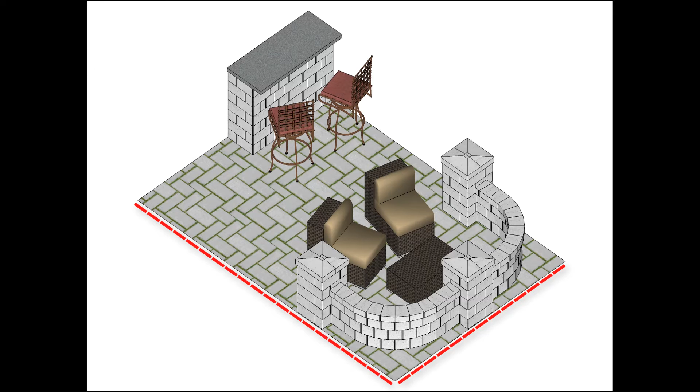AB Courtyard Patio Package, Burgundy. This patio package will fit on a 12 by 19 patio. These basic instructions can be modified to fit a different patio size.

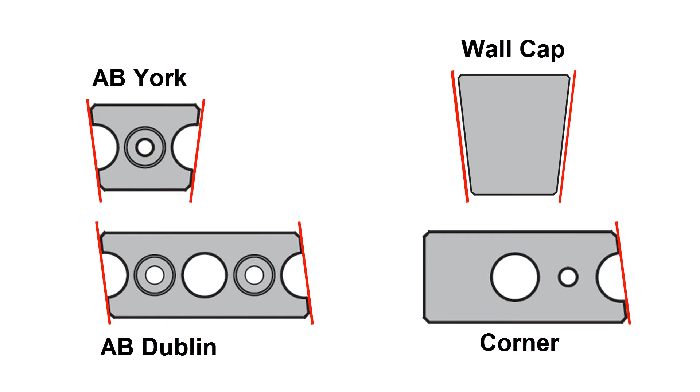This layout will use the following blocks. The blocks are modular in size, with 2 AB York blocks equaling 1 AB Dublin block. The blocks come with built-in angles, so during construction, when an AB York, AB Dublin, or a wall cap meets up to a flat surface, some cutting will be required to give a finished look to the project.

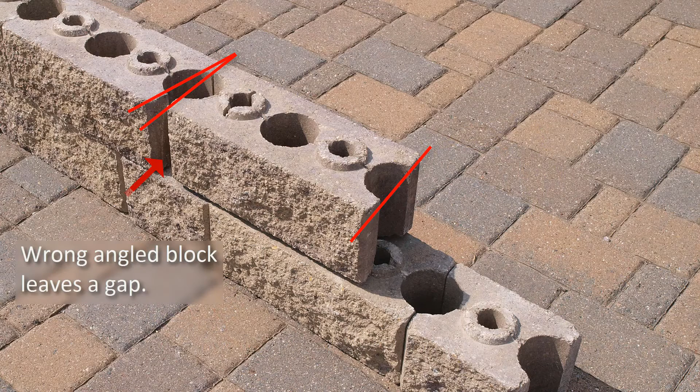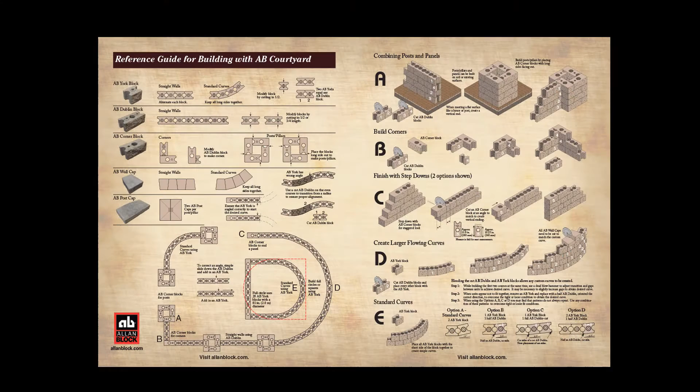During construction, the AB Dublin blocks may be angled the wrong way, leaving a gap. Simply slide the block over and add in an AB York block. For more details on proper construction, see the AB Courtyard Reference Guide.

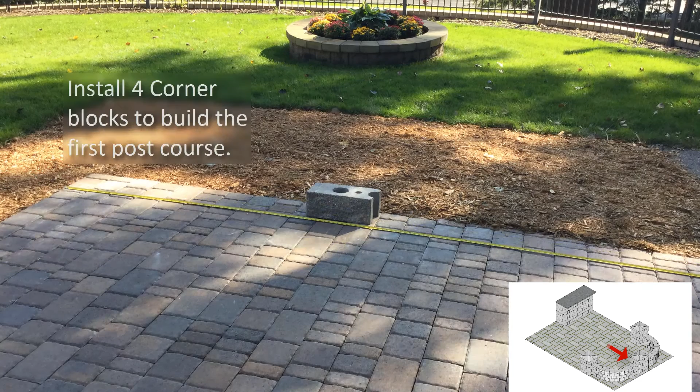To start, locate the center on one side of the patio. Install 4 corner blocks to build the first course of the back post. Corner blocks have a long side and a short side. Place the long side facing out. Check for level and use shims if necessary. Install the next course of corner blocks so that they overlap the blocks below. This second pattern will offset the vertical seams.

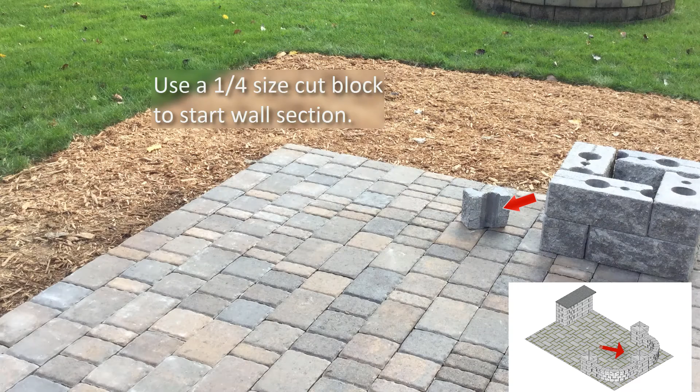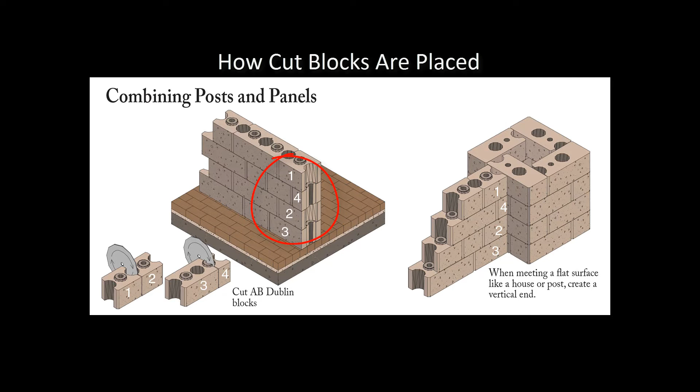To start the wall panel, we will need to use a cut block. This creates a straight side to the block to place against the corner block, giving us a clean, flush look when meeting up with the flat surface. For this project, we will be cutting an AB Dublin block in half, as well as one in a 3/4 and 1/4 size. These cut pieces will then be used on every course where the blocks of the wall panels meet up with the flat surface of the post.

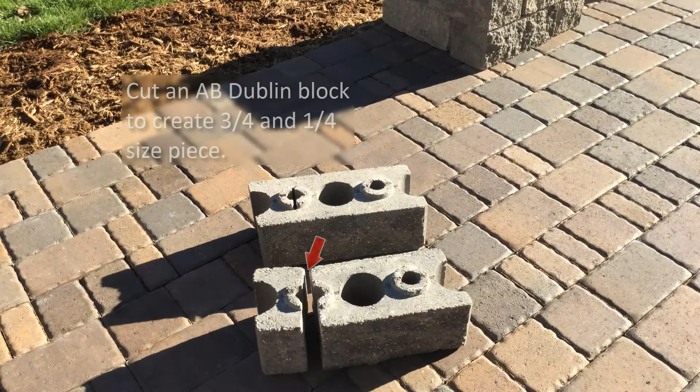When building the wall panels, installing 2 courses at the same time will help with block alignment. For the first course, use the pre-marked blocks and cut down the center of the raised ring to create the 3/4 and 1/4 size. Use a saw with a diamond blade and adhere to safety standards.

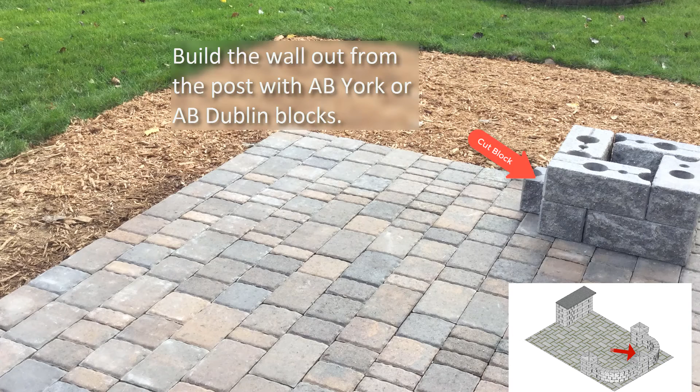Install a cut block against the center of the post to start the patio wall. Install AB York blocks to build the curve and to where the next post will be located. This wall panel will determine the exact placement of the next post. If posts are built first, custom cuts will be needed on every course of the wall panels.

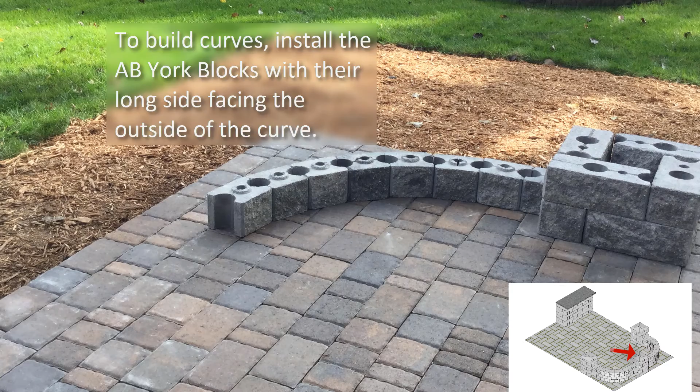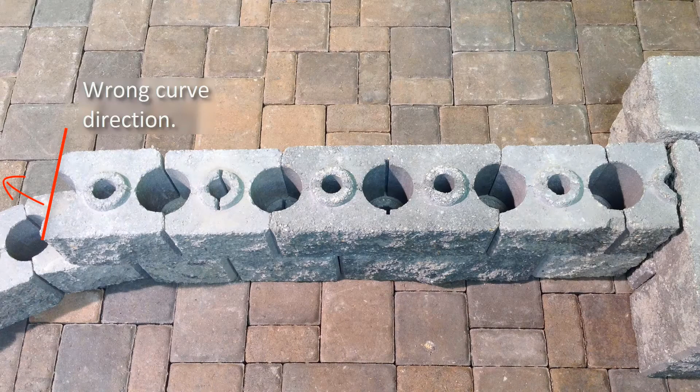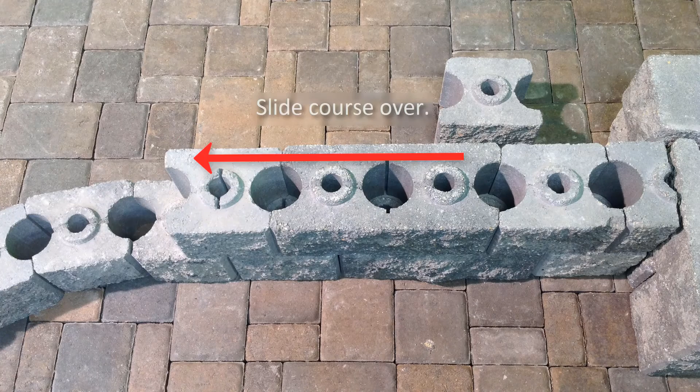Place all AB York blocks with the long side of the block facing the outside of the curve to build the curved wall section. If the block starting the curve is not angled properly, the direction of the curve will be wrong. To correct this, the initial cut block to start the section will need to be changed. Start by removing the last block that has the wrong angle and set aside at the beginning of the section. Then slide all the blocks down 1 block from the start of the section.

Remove the initial cut block and then place in the AB York block that was previously set aside. Now reinstall the initial cut block by turning the block over so the raised rings are facing down and the cut side is against the post. A second option would be to replace the initial cut block with the opposite angle cut block.

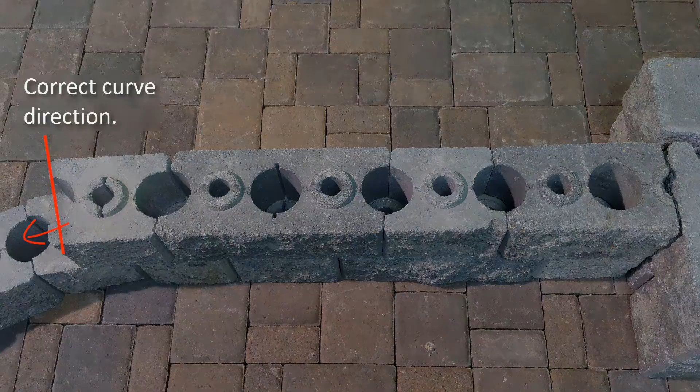And finally, a third option would be to replace the quarter size cut piece and an AB York block with a 3/4 size cut piece that is angled correctly. Once the angle is corrected, install AB York blocks to build the curve. At the end of the curve, place an AB York block with the long side facing in to create the start of the straight section prior to meeting up with the next post.

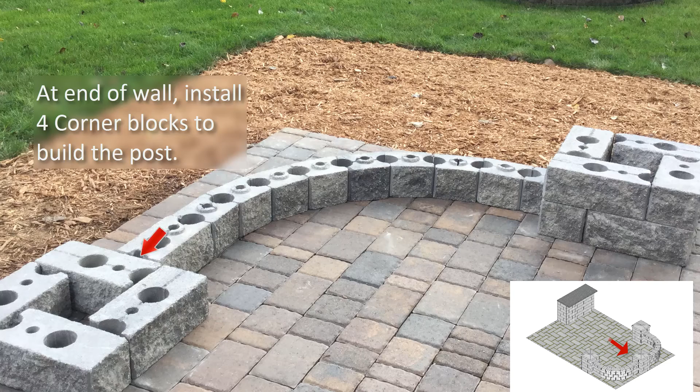At the end of the wall section, place a cut block with the cut side facing out to complete the section. Place 4 corner blocks with their long sides facing out to build the next post. Place the corner blocks so that the wall panel will be centered on the finished post. Install the next course of corner blocks so that they overlap the blocks below. This second pattern will offset the vertical seams.

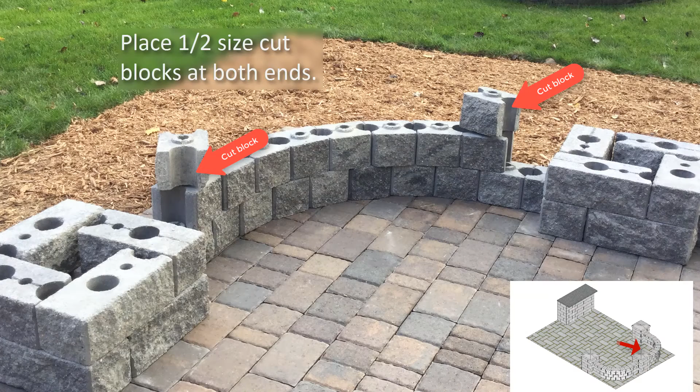To build the second course, starting in the middle and working towards both posts, stack AB York blocks with the long sides facing out. Then cut another AB Dublin block, this time in half. This will ensure the blocks line up properly and the seams are offset from the course below. Place the cut sides against both post blocks to create a finished look against the post.

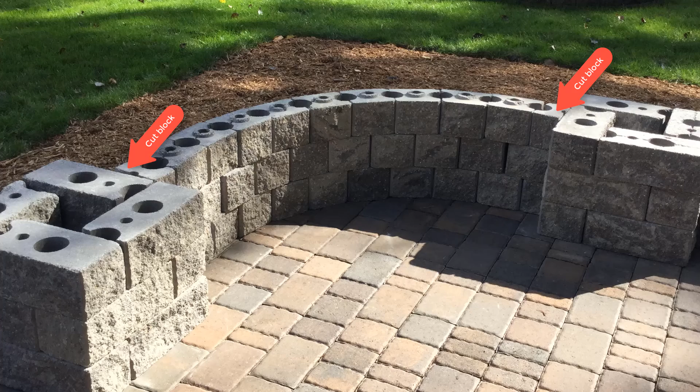Stack up the third course of the post and the wall panels using cut blocks to meet up with the posts. Install 2 additional courses of the posts, alternating the pattern on each course to offset the course below. Finish the project with wall caps and post caps. You can choose to secure them in place with masonry adhesive. With one side done, complete the second half of the project using the same steps.

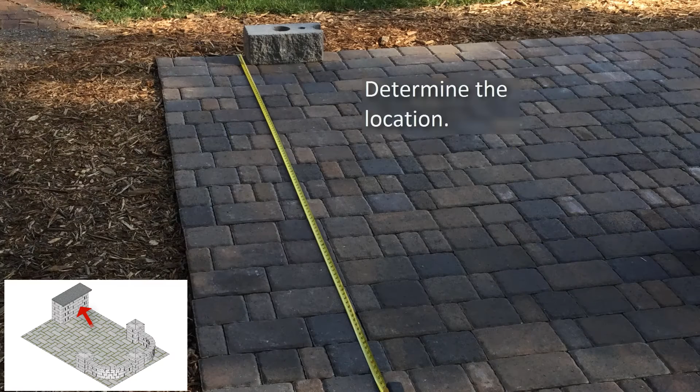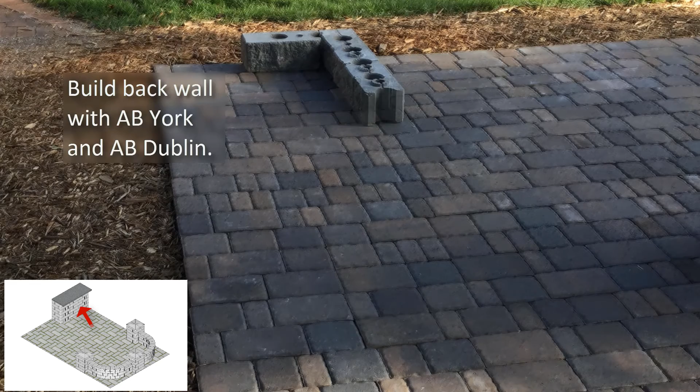To build the bar, start by measuring the space where it will be located. Place the first corner block with the long side facing out, followed by another corner block to build the corner. Then stack AB York and AB Dublin blocks to build the back wall of the bar. At the end, place 2 more corner blocks to build the corner as was done on the opposite side.

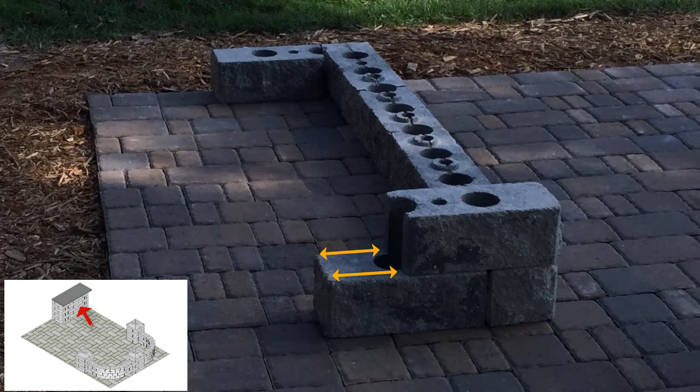To start the second course, a custom cut corner block and a cut AB Dublin block will be needed. Place one corner block so that it's offset from the corner blocks below. Measure and custom cut a corner block to complete the end. Build the wall panel starting with a 3/4 sized cut block. This creates a straight side to the block to place against the corner block.

Using AB York and AB Dublins, build the back wall panel. At the next corner, end with a 1/4 size cut block, cut side out to meet with the corner block. Then measure and install another custom cut corner block to finish the course.

Using the same patterns from the first and second courses, build an additional 4 courses, alternating between each pattern per course, offsetting the vertical seams and locking the blocks together. On the 7th and top course, install the same pattern as was done on the first course. This time, place all of the blocks with the raised rings facing down. This creates a smooth surface for the countertop to be placed on. Install the countertop material. Secure it in place with masonry adhesive.